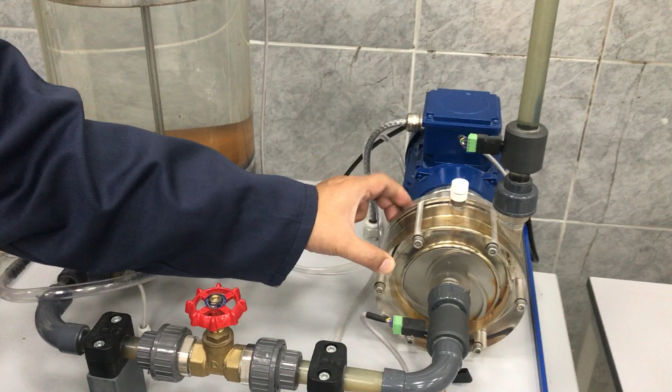Okay, so this equipment is a centrifugal pump experiment. So we can do experiments with a centrifugal pump here. So let me check some of the parts here. So our centrifugal pump is located here. The housing or the casing is a solid acrylic glass.

Then you have the bleeding section here. So we will bleed the pump by opening this nut here. This is to remove the air inside the pump. Then we have this valve, we call it V1. This valve will control the suction side of the pump. Then we have V2, controlling the discharge of the pump.

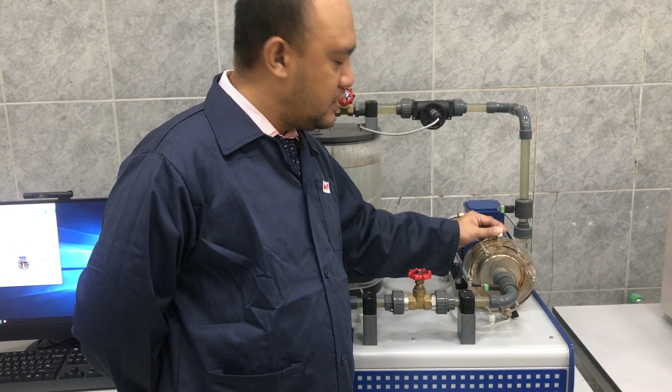So for experiment number 1, we will be measuring the head and the power of a centrifugal pump. The first step is to bleed the pump. So open this, release the air from the pump and close it tightly. As you can see, the pump is filled with water only. So this is the first step. The next step is to fully open V1 and V2. Okay, so we have 2 gate valves here, both must be fully open.

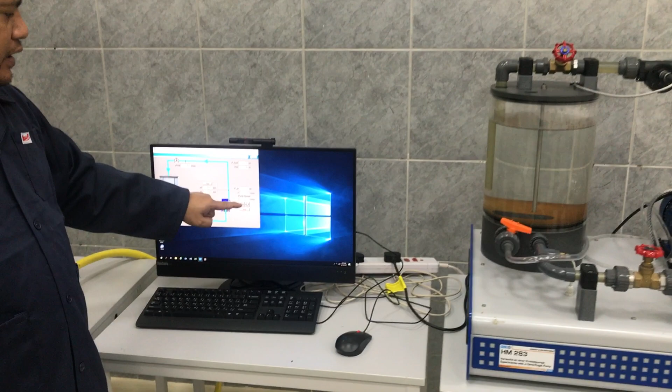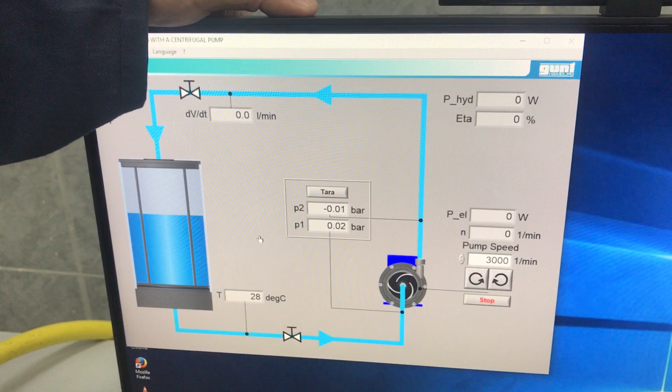Now, referring to the table, we will set the RPM, the pump speed, to 3000 RPM. This centrifugal pump is interfacing with this PC, so all the control will be on this software. So after bleeding the pump and opening valves V1 and V2, set the speed to 3000 RPM. We will be using this RPM all throughout the experiment.

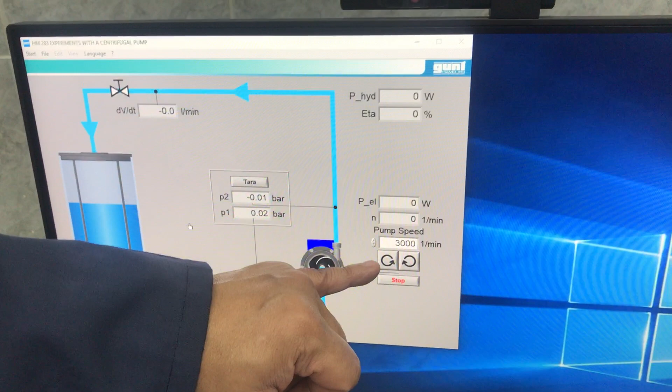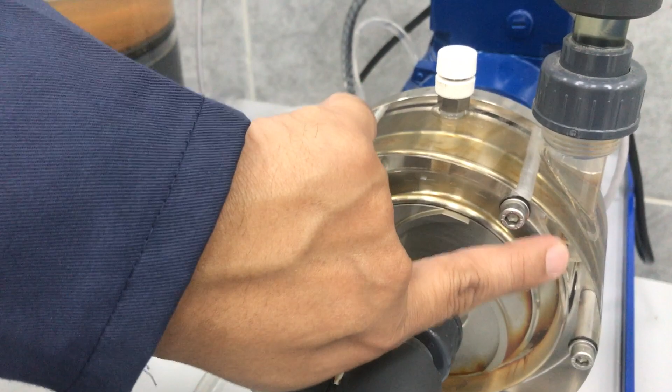So how to switch on the pump? Press this one. This symbol means the rotation of the pump is in an anti-clockwise direction. As you can see here on the pump, when the pump rotates anti-clockwise, the direction of the water pumping is towards this direction, moving up. So the rotation is anti-clockwise.

So let's start checking the operation of the pump. By pressing this, the pump will start running. From the suction side, through the eye of the centrifugal pump, the impeller, and then pumped up. This sensor here measures P1, the pressure in the suction, and P2 at this point, the pressure at the discharge.

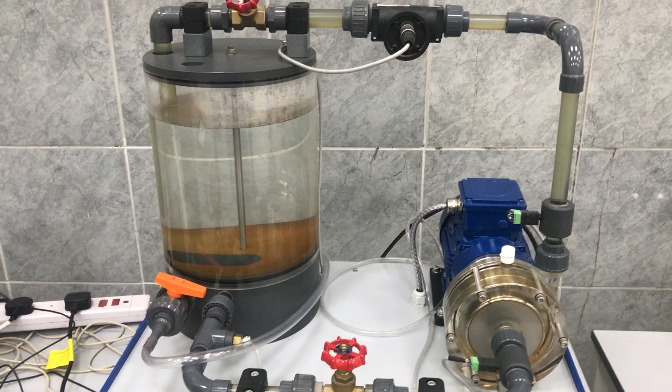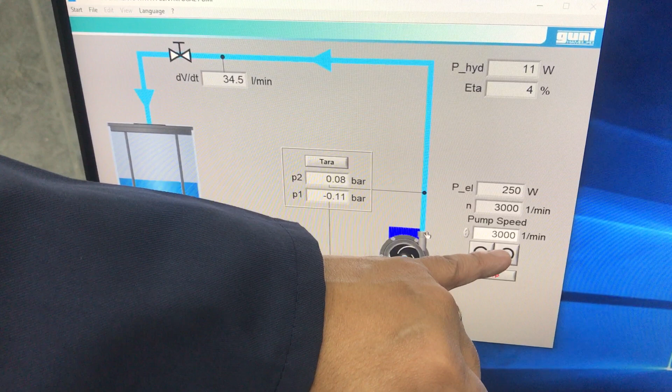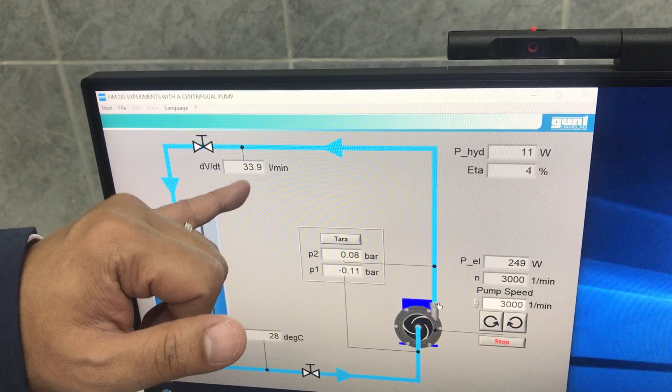For the first trial, we will take the reading of RPM. We will be using this for all the trials, 3000 revolutions per minute. So this is our RPM. Then we will measure Q. Q is in liters per minute, so 33.9 liters per minute. If you look at the table, it should be in liters per second, so you should convert this reading into liters per second.

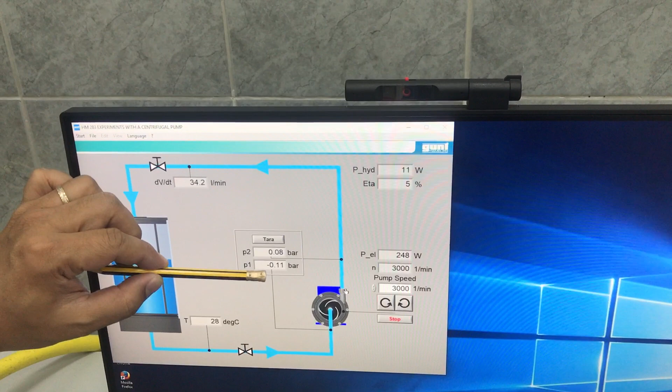So let's take the reading for trial 1. The pump speed is 3000 RPM. Q is 34.4 liters per minute. Now P1 will be negative 0.11 bar. As you notice here, the unit is in bar, so you need to convert it to Pascal, since we'll be using metric units in the experiment. So 0.11 bar for P1 and 0.08 bar for P2.

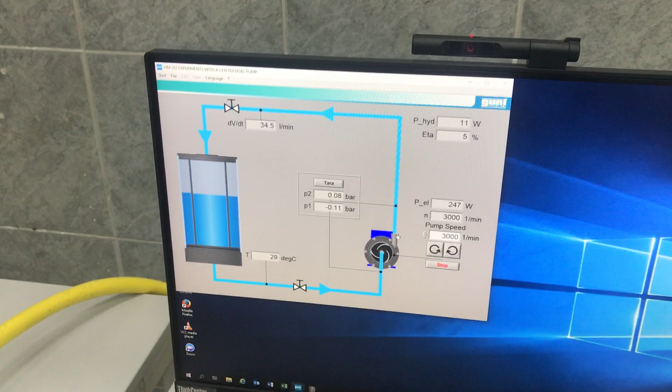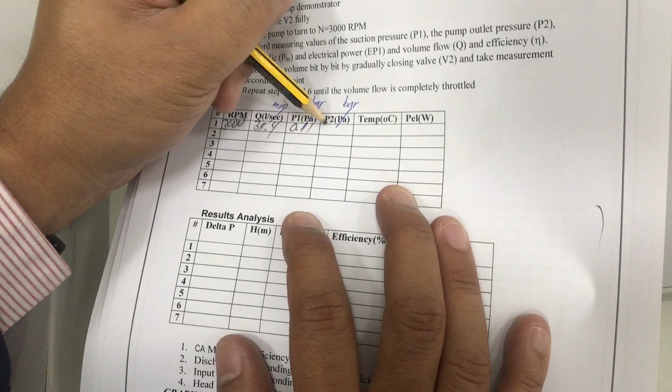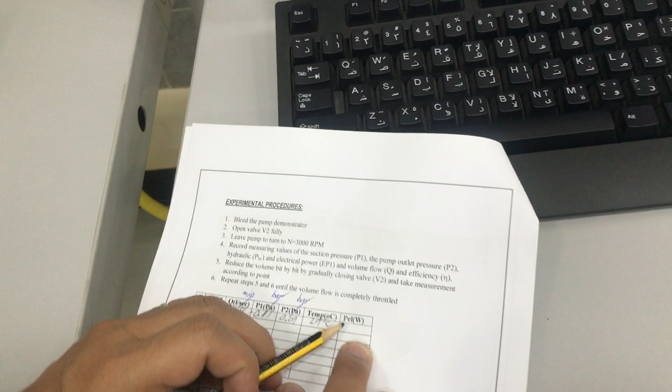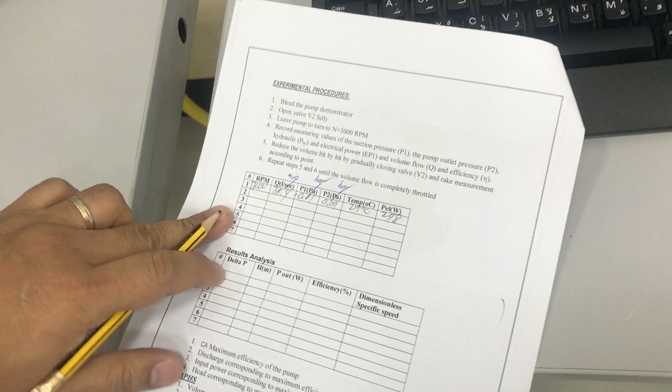So this is in bar. Now the temperature is also shown in the software. This is the temperature of the running system, so we have 29 degrees. And the electrical power, PEL, is 248 watts. Okay?

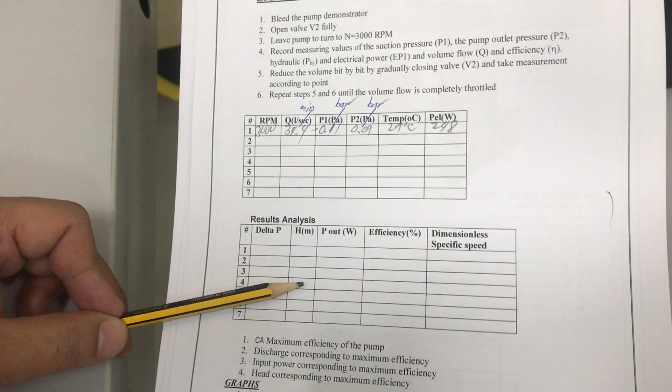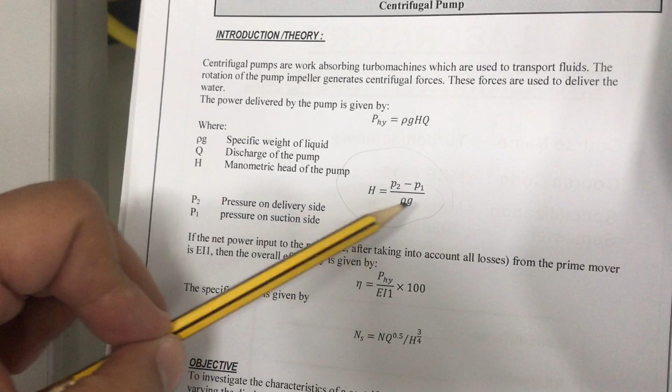So, it will be calculated on the theory using this given formula. So, delta P divided by rho g, so the density of the water multiplied by 9.8 meters per second squared. Okay? So, you will get the value of H. Now, P out, this is the hydraulic power. So, just compare this one.

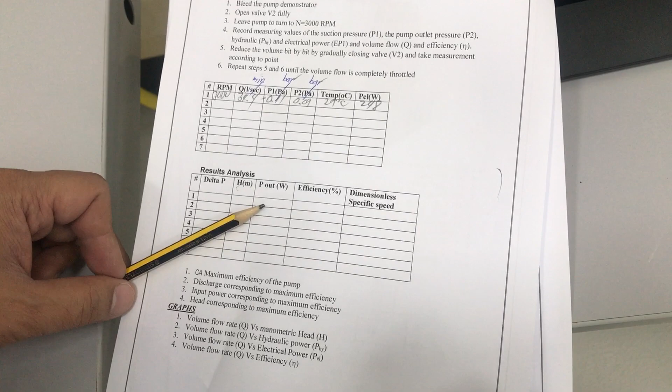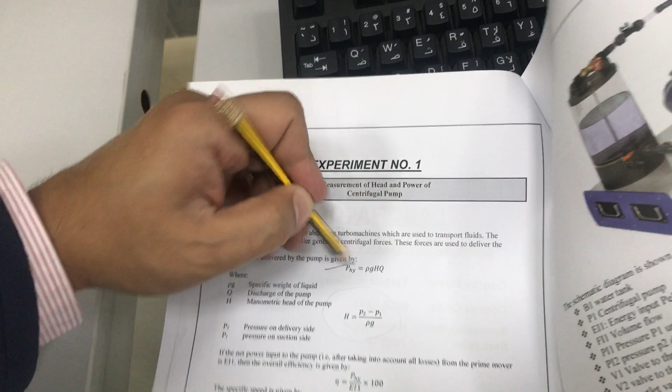So, this 77 watts experimental and calculate it using power delivered by the pump. This is by theoretical. So, rho g multiplied by HQ. So, you have the value of H, you have the value of Q. Right here the P output.

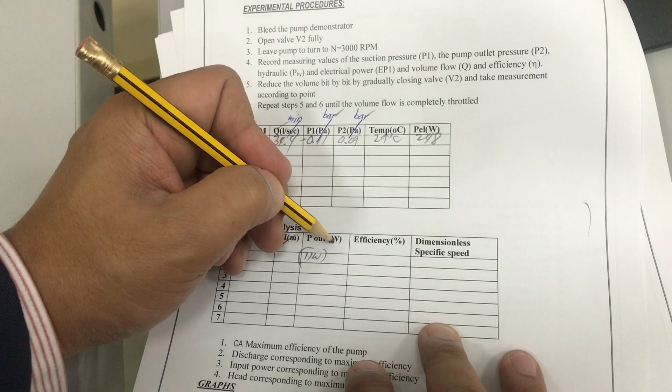So, the efficiency, we have also here the formula for efficiency. And you have the specific speed. The specific speed formula is also taken from the theory part of the experiment. So let us continue doing the experiment. So now we will go on trial 2. We will be using the same RPM, 3000.

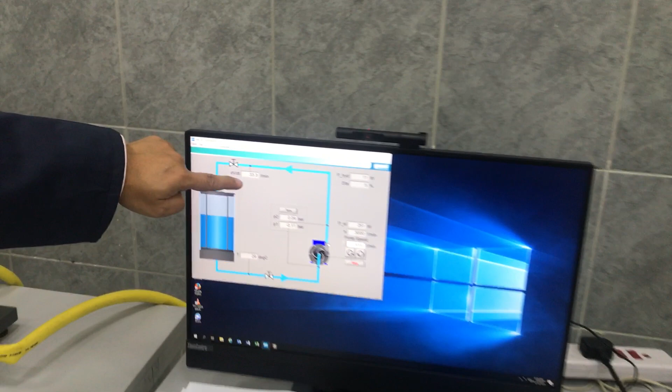But in this case, we will reduce the value of Q by closing this valve V2 gradually. So bit by bit. So I'm closing it. And take the reading of Q. So as you observe, this is decreasing. So 33.7.

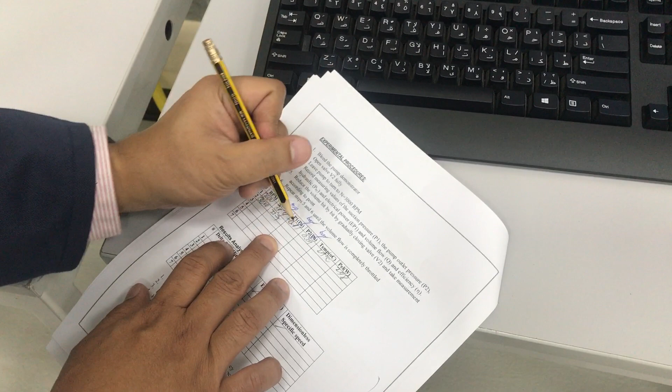33.7, and then you have 0.11 bar and 0.1 bar. Temperature will be the same, 29 degrees. The power will be 250. So this is our electrical power.

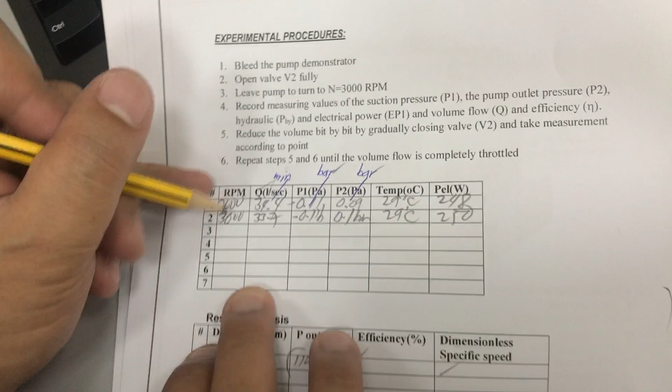Next, trial 3, also 3000 RPM. Again, close the valve V2 just a little. So we are throttling the discharge of the pump. So trial 3, take the reading. So you will be having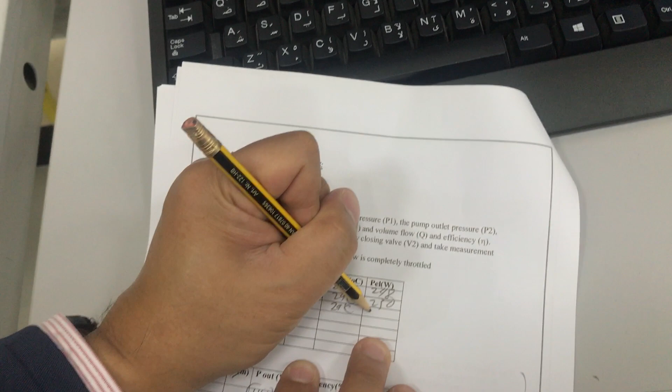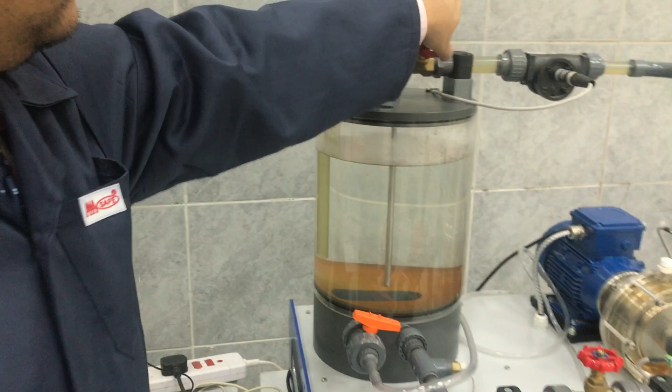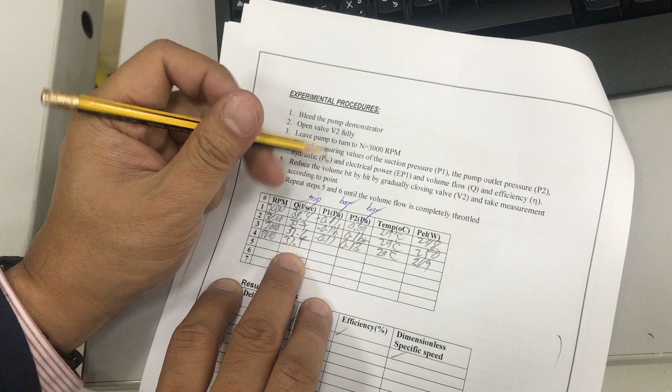Now again, close the valve V2 for trial number 4. Take the reading. So you have 31.5 at the same RPM. So 3000 RPM, you have 31.5. Pressure will be 0.09. P1, P2 will be 0.21 with 29 degrees Celsius and 247 watts of power. Next.

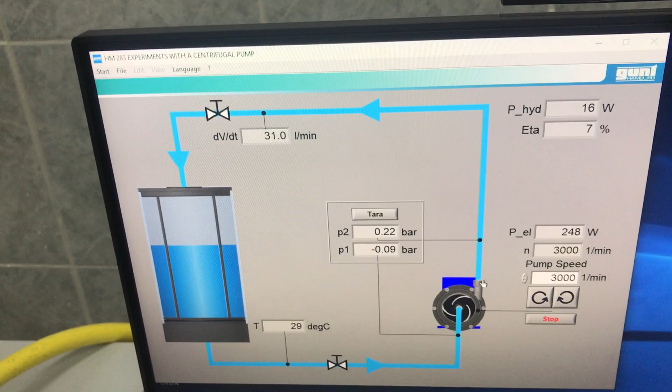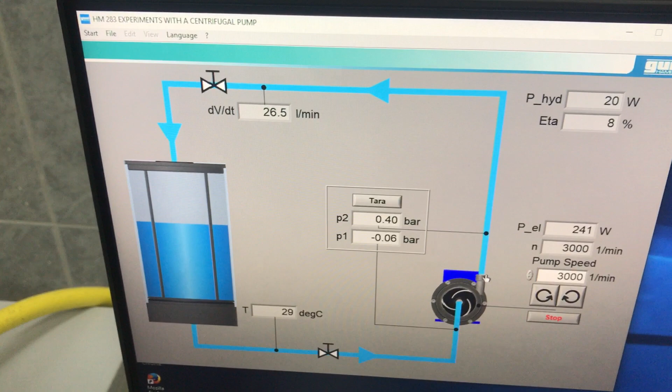So again, decrease the discharge. So you have 26.4 at a pressure of 0.06. So P1 is decreasing. P2 is increasing with the same water temperature with a power of 241 watts.

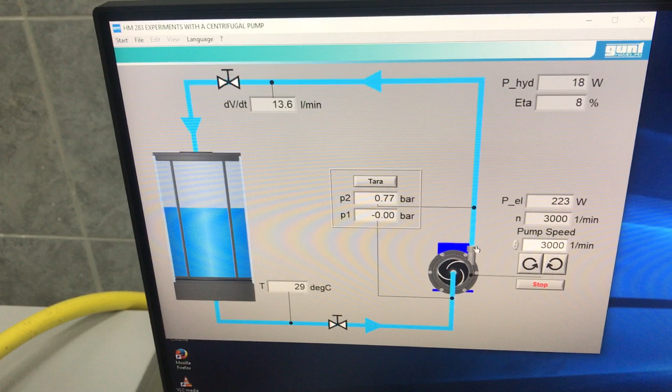So trial 6, you have at 3000 RPM. Again, close the valve. Observe the Q or the discharge. So we have 13.6. So P1, it reached the 0 point and then 0.77. P2 is increasing at 29 degrees Celsius and a power of 223 watts.

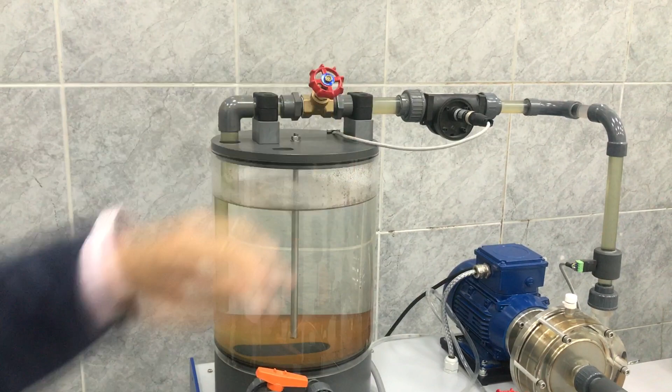Now for the last trial, it is almost closed. So fully throttled here. So fully closed, almost no discharge. So you have at 3000 RPM, 5.3 liters per minute. 0.02 bar and 0.93 bar. At the same water temperature, 211 watts.

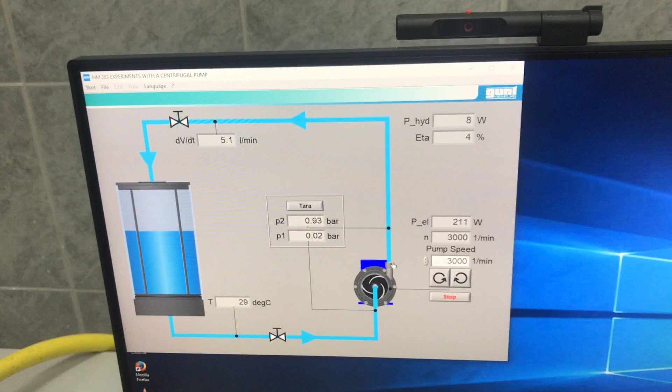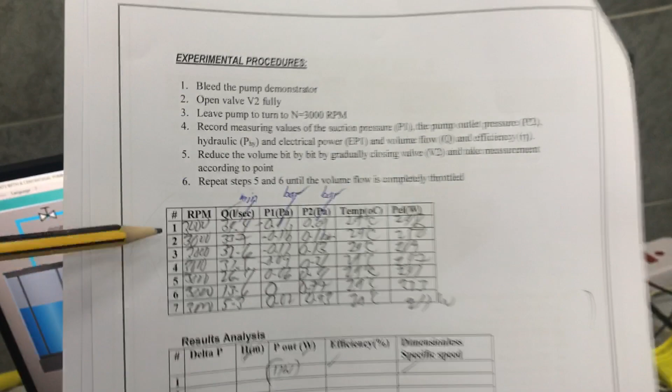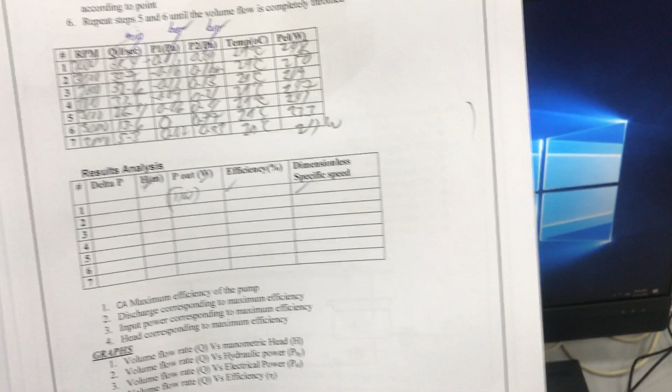So after completing this one, V2 is fully closed. So our table, we did 7 trials here. After completing this table, you will calculate the result using the given formula in the theory part. So to stop the pump, just press this stop button here. And then the pump will stop running.

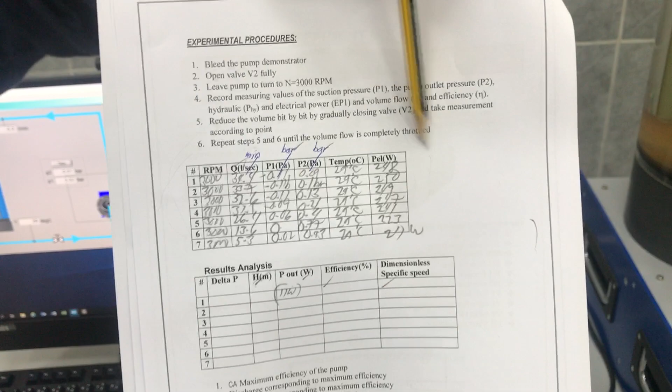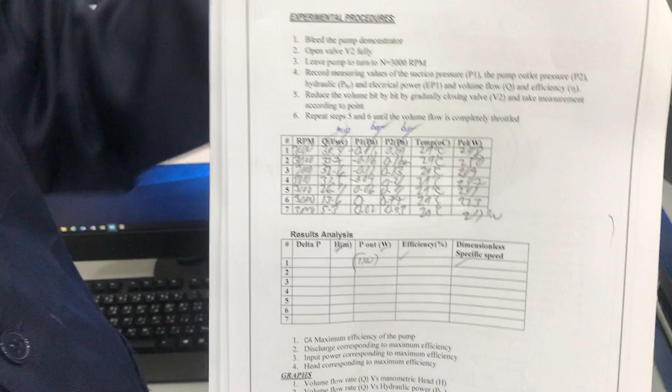So this experiment can be used also in experiment number 2. So just complete this table and you will use this reading in the affinity laws of the pump. So experiment 1 and experiment 2 are somewhat related. Okay?

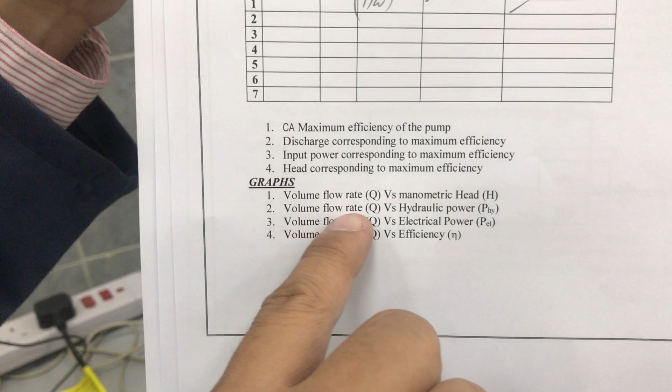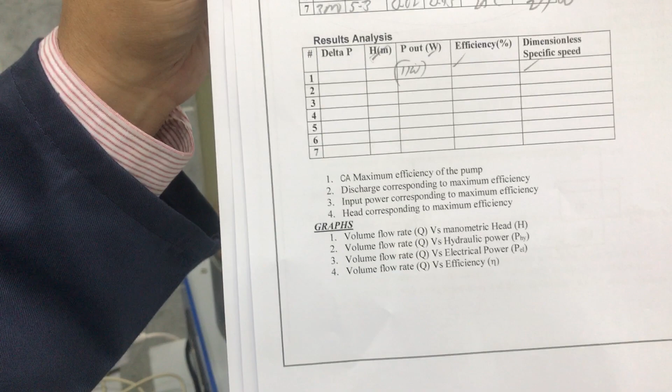So for the graph, you need to plot the volume flow rate versus the manometric head after calculation. Volume flow rate versus hydraulic power. So it will be given here. Electrical power, volume flow rate, and efficiency. So you have 4 graphs to be completed in submitting the report. Okay, so that's all for experiment number 1.